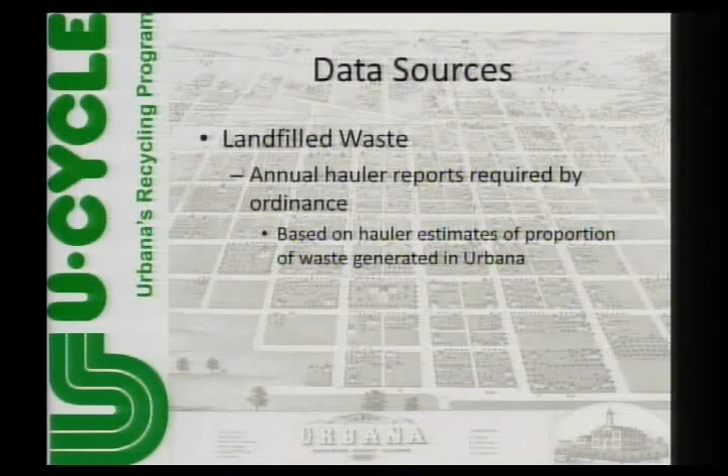A hauler could pick up multiple accounts from the county, the city of Champaign, the city of Urbana, all with one truck. So when they go to the transfer station and scale their weight, they're estimating their proportion that is coming from Urbana. That's just a reality of having many different commercial haulers that serve our citizens.

The U-Cycle program in 2012 had an increase of 27% in curbside collections from 2011. A lot of growth there. The multifamily recycling collections went up 21% from 2011 to 2012.

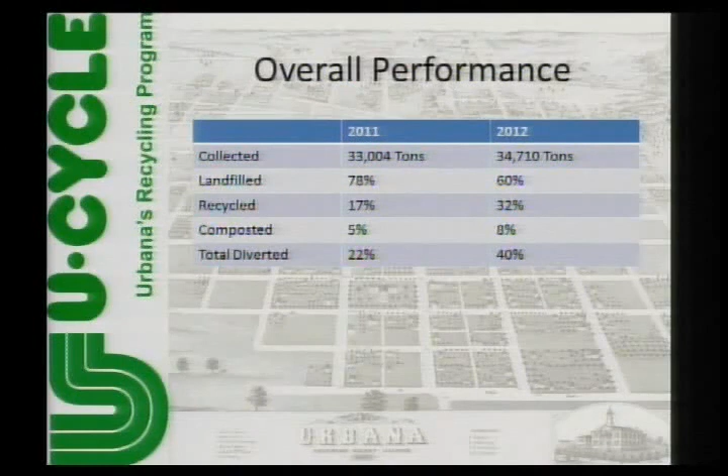The overall performance for our waste, recycling and composting for the city: the total amount of materials collected went up just a little bit, but the amount recycled went up dramatically. The amount of materials the city composted went up slightly, and we had a fairly dramatic increase in the total amount of waste diverted from the landfill, up to 40%. So pretty happy about that performance in the last year.

Some of the causes for the increase: we believe economic improvement is probably why people are buying more stuff and hence throwing away more stuff. That's why the collections as a total are up, most likely.

Also, due to increased outreach and communications, we think the percent of collections that were collected as recycling went up. And finally, better data from public works activities - we've made an effort this year to really count all of the recycling that Public Works has been doing as a matter of course for several years. For instance, they recycle a lot of the concrete and millings material, which had never been counted before, so we've put that into the data as well.

Thank you. I'll take any questions.

Can you describe the trend of our diversion rate over time? Hard to do because we did not have this required hauler reporting until 2011.

I don't know what the estimates were based on before. I'd heard estimates in past years, but I don't know how we calculated that. They may have been coming from some estimates on how much waste is generated per capita in the United States. So what we've got now, even though it's not precise, is a lot more accurate, most likely, than just basing on national average.

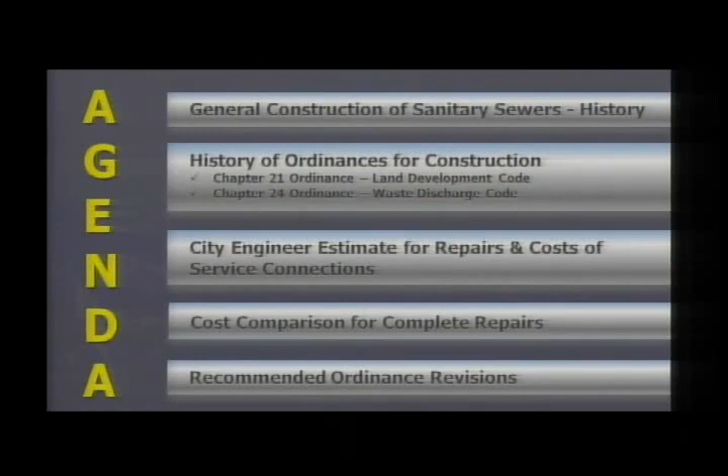So we go on now to the general construction of sanitary sewers. It used to be, and I certainly designed some of them, I know Bill has and Gail has, that the sanitary sewers used to be best placed in the back lot lines. The reason was they were cheaper to do there, you could get them deeper, and you didn't have the roads all torn up with a bunch of laterals. It was really a good way to get the sanitary sewers in, and the road construction could go on in a timely fashion, because usually the sanitary sewers were the things that held it up.

Along this back lot line here - this is not in existence in Ellis subdivision, simply an example - that is a back lot line subdivision. And Diane, in our neighborhood, most of the sewers are in the back lot line. As a result of the sewers in southeast Urbana, there were problems getting them maintained, because people planted trees over it, put fences over it, put buildings over it. It became a real nightmare. So the city, in 1988 or in that time frame, said we've got to change that, because we cannot maintain these things and we don't want to keep building them that way.

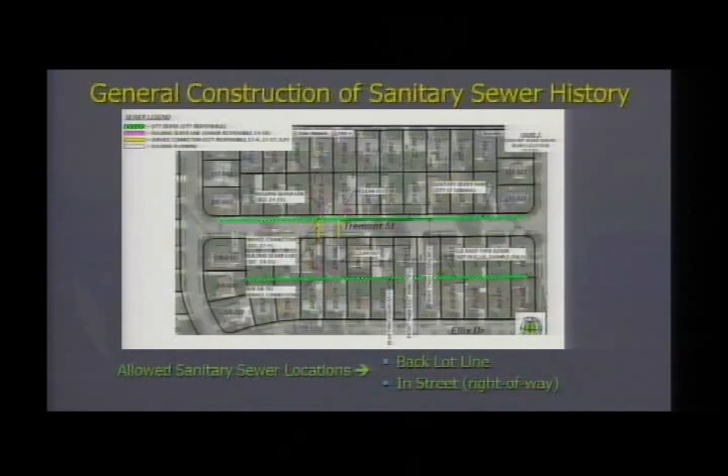So a very well-written ordinance was approved in 1988, and it's the standard by which we have developed things in Urbana ever since. Just blow this up a little bit - okay, there we go. This is a blow-up of just a sample of the lots there. This is the back lot line, this is the sewer that's out in the street - that's where the ordinance allows you to put it now. The purple is building sewers; those are the sewers that are on private property.

They're the responsibility of the person building the building. That's the sewer, the little squares are cleanouts. You have an ordinance right now that requires any new construction to have cleanouts. For old construction, what usually happens is when they repair it, they put a cleanout in because they're afraid they'll have to come back and do it again. The yellow are the service connections by definition in the ordinance, and the green is the main lines.

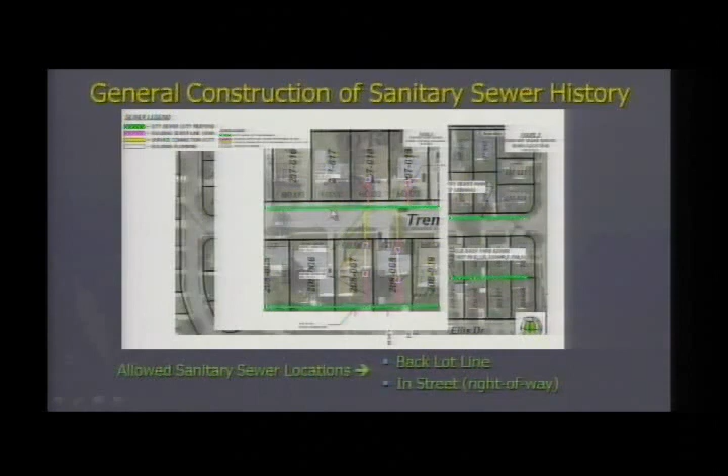This is a cross section through there. If you look off to the left, you see the green sewer. It is in an easement. That's the way most of the sewers were, in the back lot lines. They were in easements.

The purple is the building sewer connection to the house. That's usually somewhere between 45 to 55 feet, depending on the length of the lot and the house. But the service connection is on the main line, and the service connection is just that Y. The only time it would not be the Y is if there's a riser pipe to get it up closer to the service. So the service connection, as it used to be when we were designing these things, is in the back.

Then we go out front, you see the yellow here. This is the definition of service connection in the new code. Here is the building sewer, just to the right of the building, with a cleanout. Then you have the green main line. And on the opposite side of the street, which is the short connection when it's in the street, you've got the building sewer, but the connection pipe is only about 10 foot long. Usually these sewers are put 10 to 12 feet off the property line, the right-of-way line, so that they end up in the parkway.

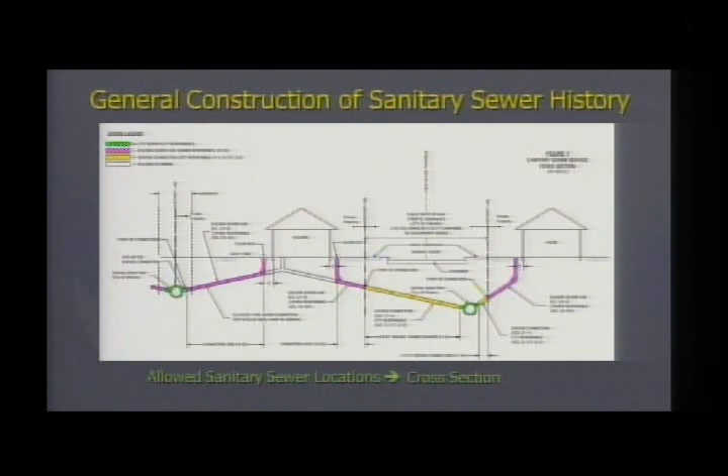This is Chapter 21 of your development code. It was approved in 1988. It is a great and very well thought out thing, one of the easiest codes to design to because it is so well thought out. At section 21-4 is the definition of service connection, and that changes what the service connection was from the old backyard connection. It says it means a connection for any required utilities. That's any utility, but it does include sanitary.

Service connections are distinguishable from the main line in that while they connect to the main line, the service connection terminates at a specific lot. In other words, out front, the service connection, in essence, extends that Y to where it gets to the lot line. And you say, well, what does the lot mean?

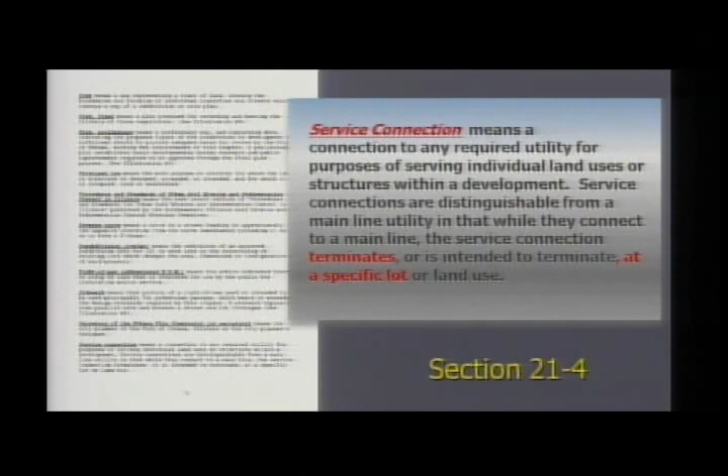If you go to section 21-57 of the same chapter, it says each lot has to be provided with a service connection. It's the city's duty. They must provide each lot with a service connection, and they do. It used to be you just stuck a Y in there and marked it on the as-built plans. Now you stick the Y in there,

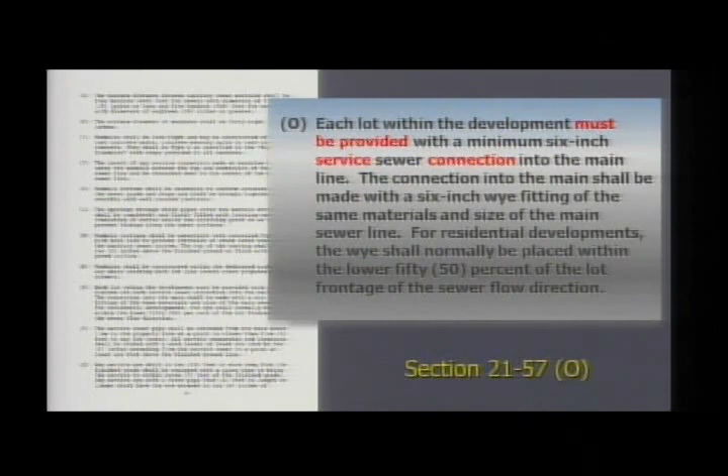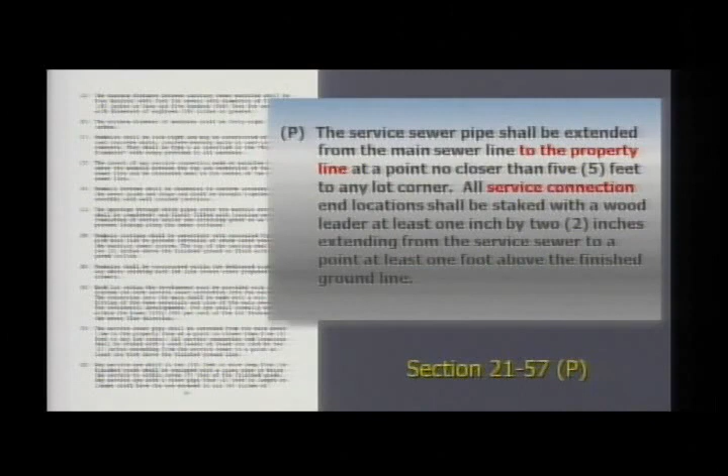and according to section P of the same section, you get it to the property line. It goes to the property line at a point no closer than 5 feet from any lot corner. All service connections, there's no doubt we're talking about service connections, shall be staked with a wood leader. It's posts that you stick up so you know where they are. So what happened is it changed, because that's all out in the right-of-way now, and they wanted that service connection to get to the lot. It had to get to the lot, and that's the way they did it.

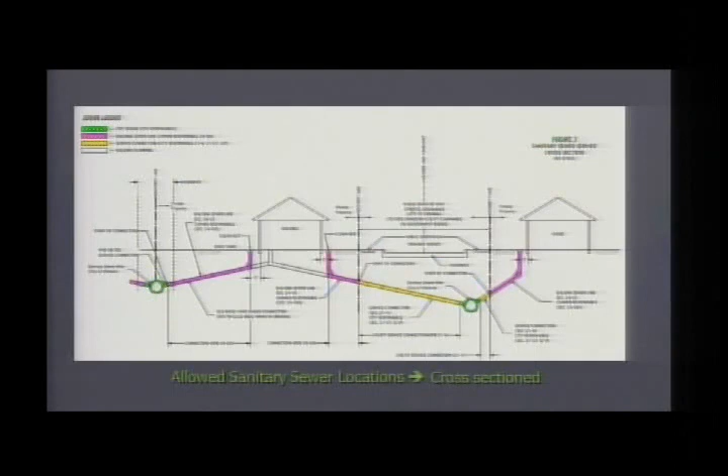In Chapter 24, it defines what a building sewer is, and it means 5 foot from the wall. It's usually located partially on private property and partially on public property. If it's on public property, it's usually a mistake.

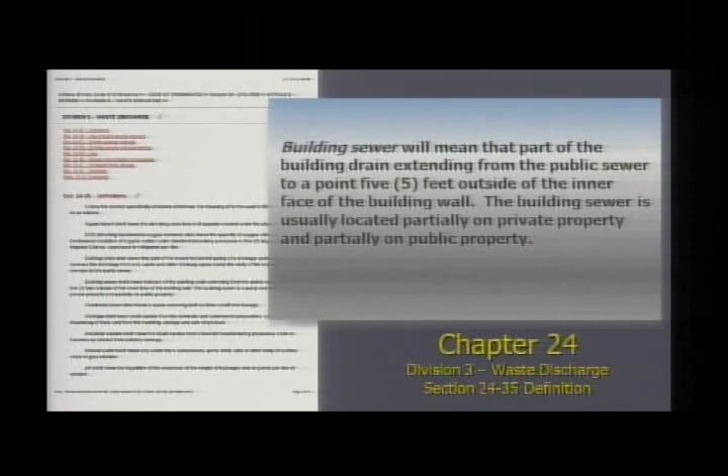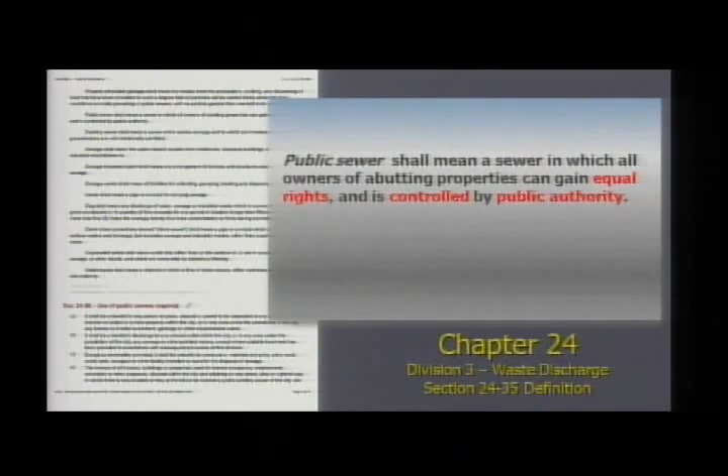And the public sewer means that abutting properties can have equal rights. It's just as easy for one side as it is for the other side. Equal rights, and the public sewer is controlled by the public authority. In this case, it's the city, because the city is the only ones that allow you to hook up to it. Sanitary district doesn't.

And this is the ordinance, which is a very well-written ordinance that says in the backyard lot lines or the building sewer, the city wants no part of having anything to do with any kind of costs. The owner put it together. He built it with the pipe he wanted to. He built it the way he wanted to. He followed all the plumbing codes, and it's his baby. If it doesn't work, the city wants nothing to do with it because it's on private property, and I agree with that. That's a terrific ordinance right there.

But the thing is, it needs tweaked a little bit because the Y or T connection is the service connection in the back. It is not the service connection on the front by ordinance.

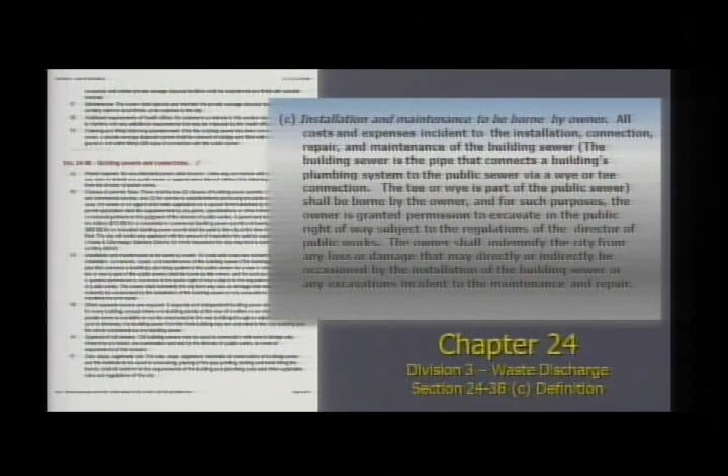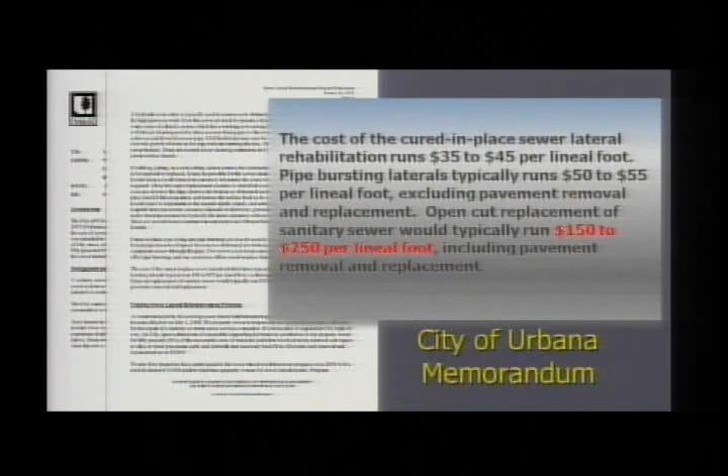This is Brad's memorandum that I gave to you before. What we're showing here is that his estimate for a very severe case, which can happen, that you've got to replace that service line going out to the front is $150 to $250 a lineal foot, and that's the truth. Because it is just a mess digging these things out. You not only have to repair everything, you've got all the utilities in the world to dig around. It is expensive, and that's no kidding.

The length of the pipe is about 55 feet. The clean out is going to be installed. If it's not installed, I say that you tweak these ordinances, whichever one you want to, but make the clean out be installed anytime somebody works on it, because it gives not only the property owner access, it gives the city access. The clean out is the best investment that you can have. Even if the city doesn't want to share in those costs, make it part of the ordinance.

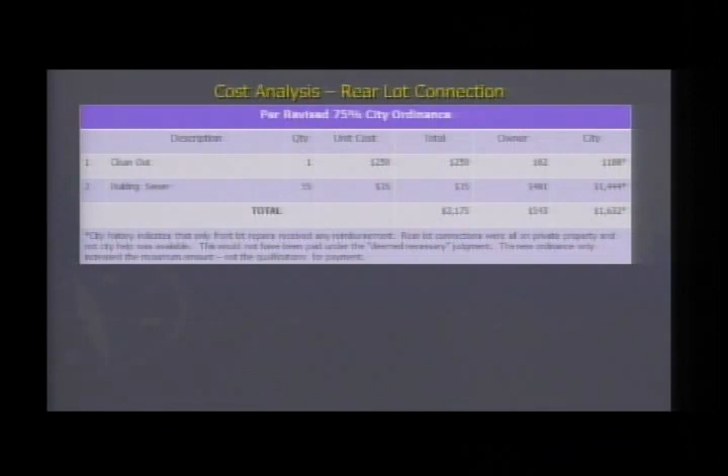So it costs $2,175. According to your 75% of it, might end up paying $1,632. But the city history indicates that you're not real fond of paying for the building sewer on private property, and I don't blame you. The city has no business on private property, and probably you wouldn't be paying this, but if you did, you would be able to pay the 75% if it was approved.

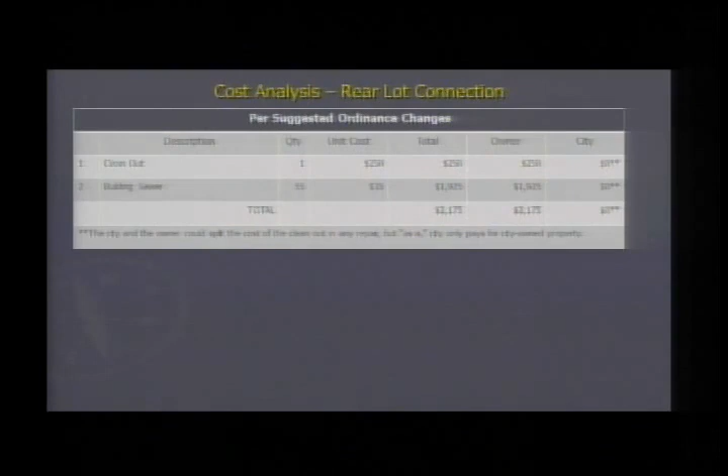In the ordinance changes that I'm saying tweak, the city doesn't pay a thing. It's on private property, it's in the back, and you're not going to mess with it. The only thing that you'd be involved with is if the service T itself was screwed up. But you would know that because that would be part of your television records. So you pay 0%.

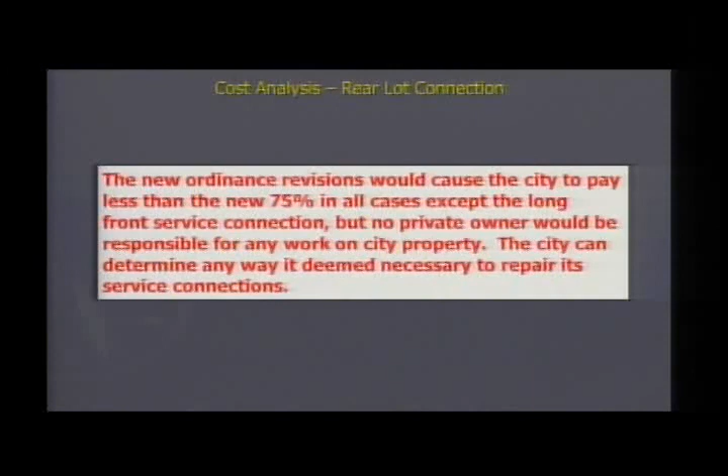The new ordinance revisions would cause the city to pay less than the 75% in all cases except the long service connection. We'll get to that. No private owner would be responsible for any work on city property. The city can make whatever methods it deems necessary to repair its own service connections. And buddy, you got some smart people here that can do that.

So we go back to the construction cost estimates again, and we look at the one that is the reason that we're all sitting here, and that's the long one where you're coming across the street. It's usually 10 foot from the property line. The right-of-way is 60 feet, so that leaves 50 foot of pipe. If you got a 66-foot right-of-way, that leaves 56 foot of pipe. It's 20 foot of the building sewer because the ordinance says 5 feet from the building face. The building face is usually 25 feet. So the whole thing costs $10,950.

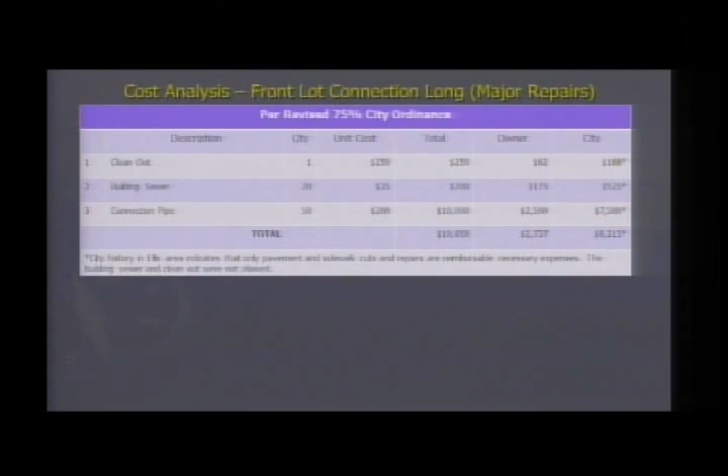If you guys want to pay 75% of it, that's $8,213. But you can't, because it's $4,500 is your top limit on this. The total cost of the owner then is going to be $6,450. So the city is not paying 75% there, it's 41%, and that's a chunk of change for a private owner to have to eat up something like $6,000. That's where the problem is.

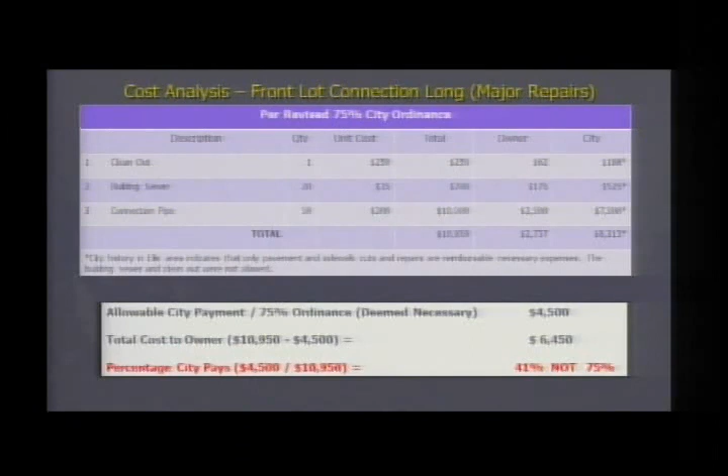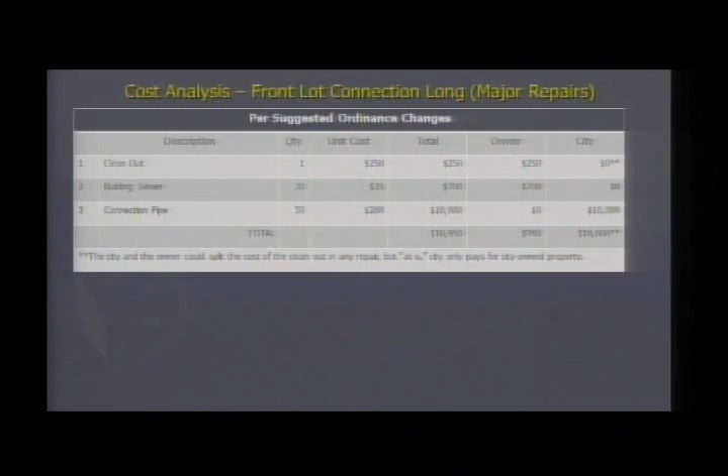If we take what I'm suggesting, that you tweak the ordinances and city is responsible for city property, people are responsible for private property, the city would pay $10,000 and the owner would pay $950. That's 91%. But that's only on those things where it's on the wrong side of the street. It has to hit that.

If you look at this and say no private owner would be responsible for any work on city property, and the city can determine the way it wants to repair it, I'll guarantee the last thing they'll want to do is dig up the road. Nobody does. There are many ways, and Brad discussed them - you can sleeve it or pipe burst it. There's many ways to do it on that long connection, and I'd bet you come up with something different. Even directional boring can work, where you just dig on one side of the street.

The new ordinance, if you do what I'm suggesting, the Section 24-38, allows the private work to be on private property, and it saves the city money in all cases except the long service connection. You don't do anything or pay anything for private service with this ordinance. There are other things available that people can get help for, but let's not do it through this maintenance ordinance. No property owner in the city should suffer the enormous consequences and expense associated with long connections, as the 75% ordinance doesn't protect them.

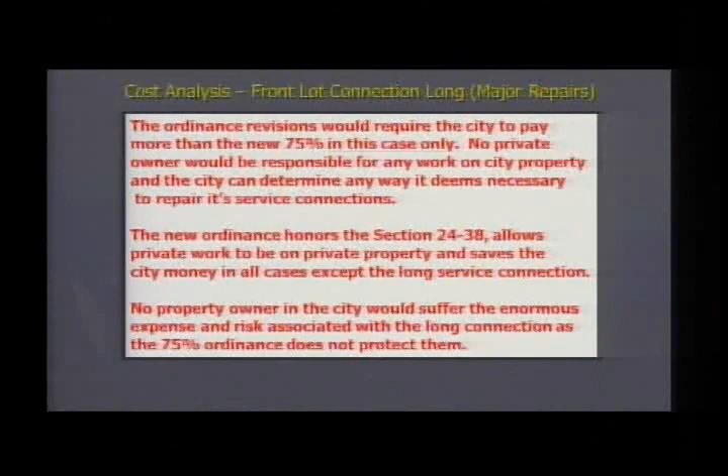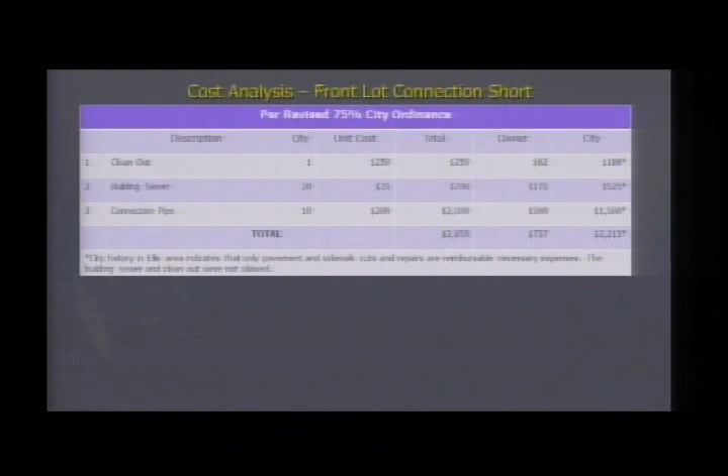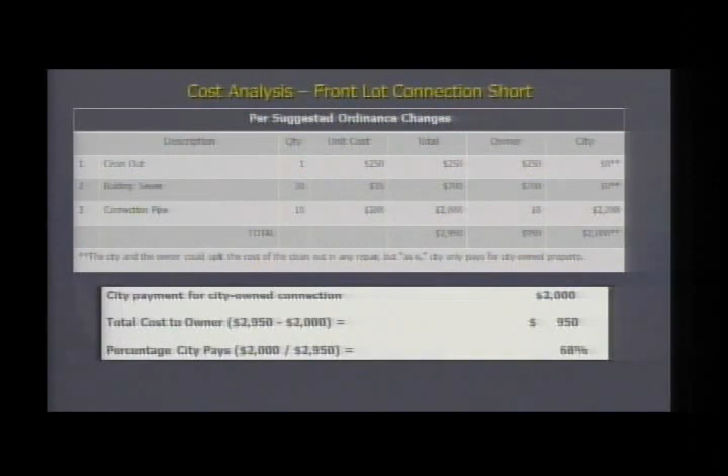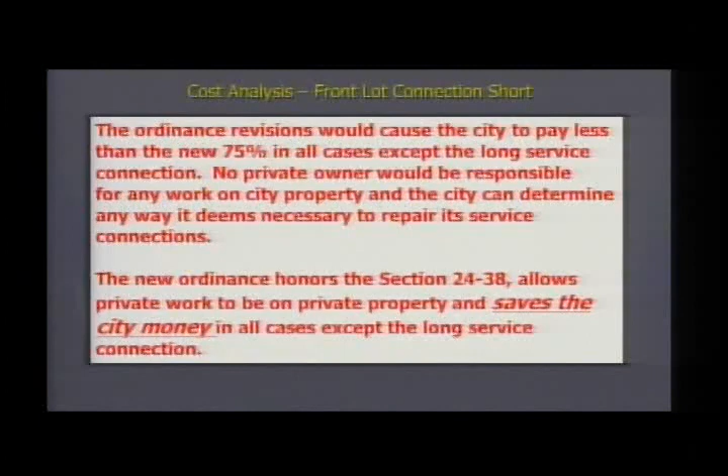That's the 75%. If you do what I say, the property owner pays for theirs and the city pays for theirs, you only pay $2,000, and that's 68%. So if you just tweak these things and hold Section 24-38 intact with just a few minor changes, it's going to save the city money in all cases except the long service connection. So I've got in here what the ordinance is and a way to do it.

If you look in the definitions on 24-35, I just added the word service connection, and then below it, we add a definition for service connections. This is taken right out of another part of the ordinance, except for the 3 examples that show what the service connection is. In the back, it's the Y or T. In the front, it's that service line that goes to the property line. If you've got an area where you can put sewers in up front that's not in the street - sometimes you can put them along an easement along the front property line where they'd have to cross both sidewalks - that's all that is.

If you look at the building sewers and connection, it's simply adding a couple of words to define service connection. There is, if no Y or T exists - if you've got a split lot, a lot of times there's no Y or T out there - then the property owner's got to add one. He's got to dig out in the middle of the road. That's his expense, not the city's. But once that gets done according to city codes, the city accepts responsibility, just as with any other subdivision, for that service connection until it reaches the inside of the property line. That way, if the building burns down or whatever, it's the same as if it was a big development.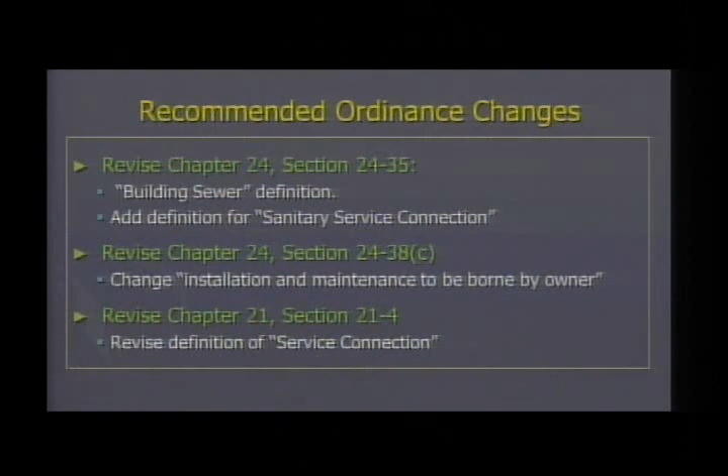And then the last thing is just adding an addition to the definitions. Okay, so let's see what I've got here - I'm not quite done yet.

What I've shown here is that the service lateral you have is actually 3 things: it's the Y or T, the service connection, and the building sewer. That constitutes a lateral. The Y and the service connection are made of materials approved by the city, approved by city testing methods, and approved and accepted by the city. The city approves the location, material, depth, and slope of the service connection by ordinance. Upon acceptance, they're given to the city by the developer at no cost to the city.

They are the property of the city, and they are in the city's property. The property owner of the lots had nothing to do with their existence. Their performance and non-performance is entirely the responsibility of the city.

That's the service connection. Conversely, the building sewer is constructed by the property owner on the property owner's land. The owner decides the location, material, depth, method, and acceptability of that sewer, and assumes complete responsibility for it. Even though plumbing ordinances control some building sewer criteria, the city ultimately has no responsibility for the building sewer. If the building sewer fails, the city has no responsibility for maintenance or repair. It's on private property, and just as the city does not repair a leaking roof built to code, the city doesn't repair building sewers.

Ordinance 24-38 is the proper ordinance for the building sewer, and the city does not want to accept any responsibility for work on private property. The owner has made all the decisions, and the owner's got to live with them, not the city.